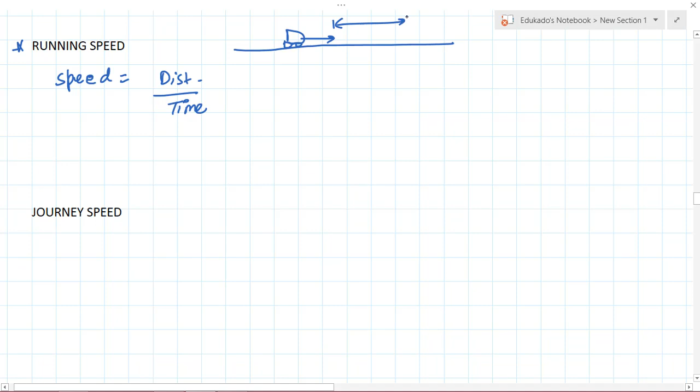Now let's imagine that for about 2 hours you have been driving continuously without any stoppage, but after 2 hours, say you took about 15 minutes of break, fine, so you stopped the car. So you can see over here that when you consider the time

only accounting for the running time, the only time in which you were driving, the time in which you kept on moving, the time you consider in calculating the speed is known as the running speed. Therefore you can say the running speed is equal to total distance traveled divided by just the running time.

Now if I talk about the journey speed, that means you also include the time you have rested. For example, in the running speed you will just observe the 2 hours time, you will not go with this 15 minutes lapse. But the journey speed will be equal to total distance divided by total amount of time. The total amount of time will be equal to the running time plus stoppage, you also call it break time.

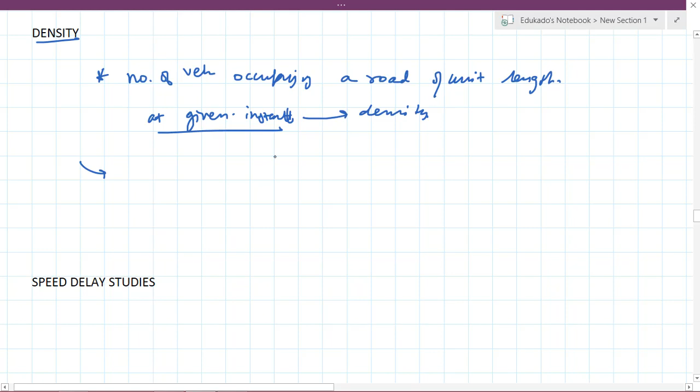Alright, so how are you going to go with this? You can take an aerial photograph of a length of a road, say X. For example, this is the road, and you took the photograph of it and you found that there are a number of vehicles like this. So you can say that the density, which is represented using the letter K, is equal to the number of vehicles, over here it's 1 2 3 4 5, equal to 5 divided by the length of this road, say x kilometers, 5 divided by x, so your density.

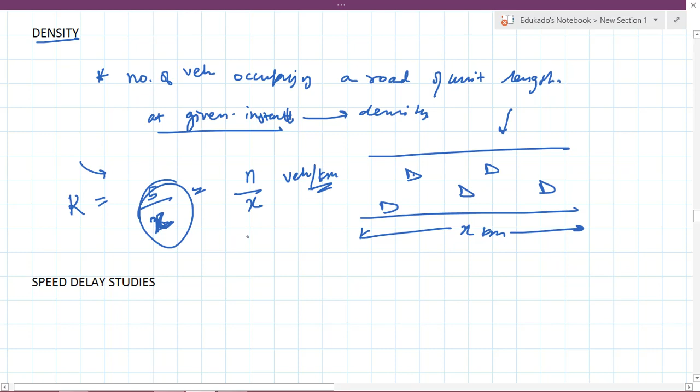So I can call it n vehicles over x distance, so you get the unit as vehicles per kilometer. So the x is the length of the road and the n is the number of vehicles. So this was the density. Now if you need to calculate the so-called running speeds, journey speeds, or the delays in the traffic, then you need to understand the speed delay studies. You need to go through these studies.

So there are a number of methods that are used, like you can make an observer stand over there to see what's the speed of the cars. Point-to-point observation is one of the methods. I can call it the standing observers method. Standing observer method is just standing over there and looking at it, and you can even make it elevated. You can go to some higher ground and watch the road that is passing by and see the speed of things, and whatever study you want to do, you can do. Another way is the license plate method.

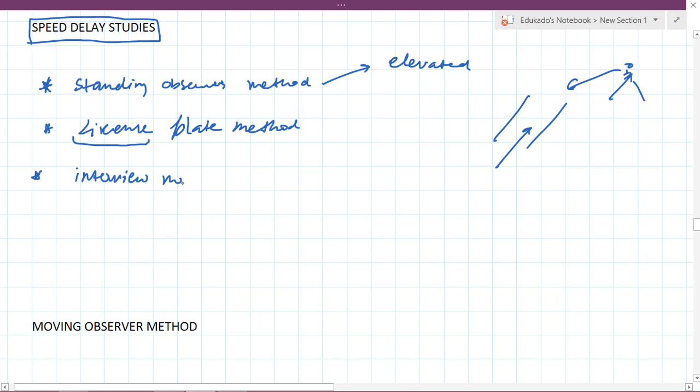License plate method, in which the license plate of a vehicle is observed or noted down, and when it is seen again, you can calculate the distance covered by it and the amount of time it took to reappear. You can calculate the speed. These are just a few of the methods, and you can even ask some people, I can call it the interview method. What was your speed and how were you moving.

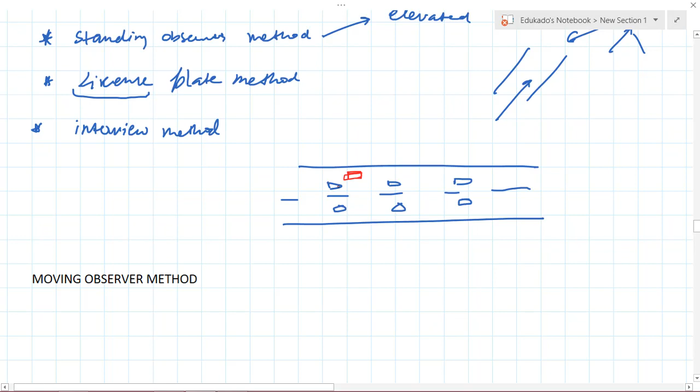Now there is one more way in which if there is traffic like this going on, fine, so there are cars moving over here, fine. So what we do, we take one car as an observing car. It keeps on moving alongside the other vehicles, and we call it the floating car.

And using this we calculate the speed and all the characteristics that we have understood right now. Density also can be calculated using this. So we can calculate the flow and speed and density. Flow, speed and density can be calculated simultaneously using this floating car method.

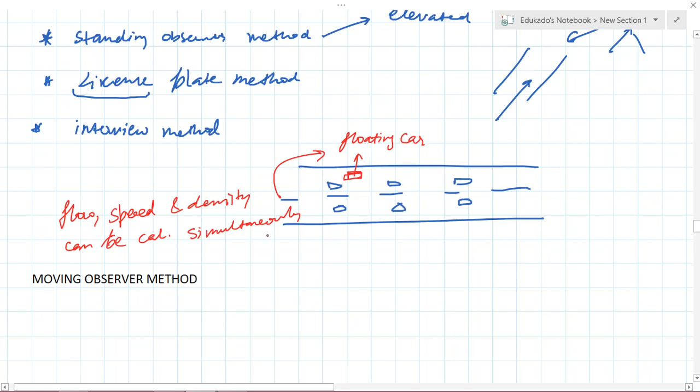Fine. This floating car method is also known as the moving observer method. So the other name for this is floating car. So if we understand about this, the aim of this experiment is to determine the running and journey speeds, to determine the running and journey speeds. Alright, so in this method, just listen to it.

In this method, the speed and the flow can be obtained by traveling in a car against and with the flow. Like I just gave you an example, the traffic is moving like this, fine, and you are in the car. I'm denoting it with a different color. Over here you are in the car and you are just moving with the traffic flow.

So it can be obtained by traveling in a car against and with the flow and noting down the journey time. You can calculate journey time. Later on you can convert it into speeds, and you can even calculate the number of vehicles that you have overtaken. This is the floating car, and the number of vehicles that you have overtaken, or the number of vehicles that overtake you, even you can calculate those things.

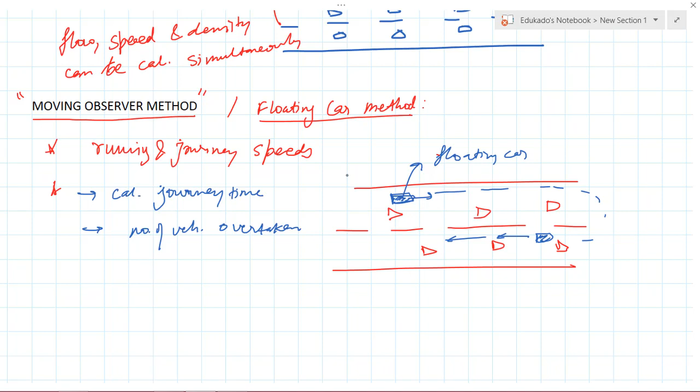And if you go like this and just take a turn over here, and now you move in the opposite direction of this flow, then you can see the number of vehicles that you met when you are in the opposite direction. All these variables you can use to calculate the speed, flow and density. So that's the moving observer method. Now you can define some parameters in it.

So if I say TW, it is the time taken by the vehicle when it is moving with the stream, like it is going from here to here. So that amount of time taken is TW. W represents with the stream. Now if I go against the stream, I will call it TA. So the time taken by the vehicle when going against the stream.

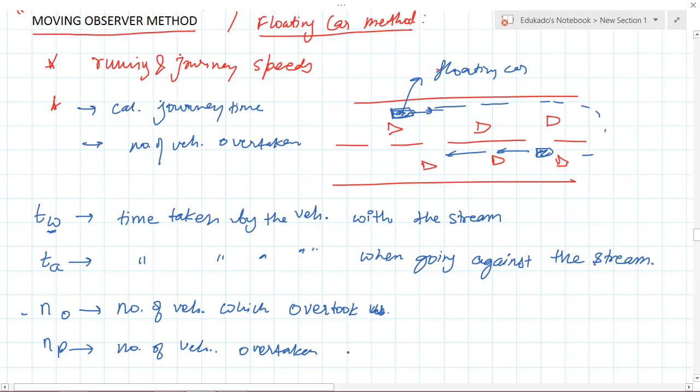Alright, so now all these times are covered. So there will be a number of vehicles which overtook us. As I told you, there can be some vehicles that overtake us. We are just a floating car, a testing car. So the number of vehicles that overtook us is represented by NO, and the number of vehicles overtaken by us is represented by NP.

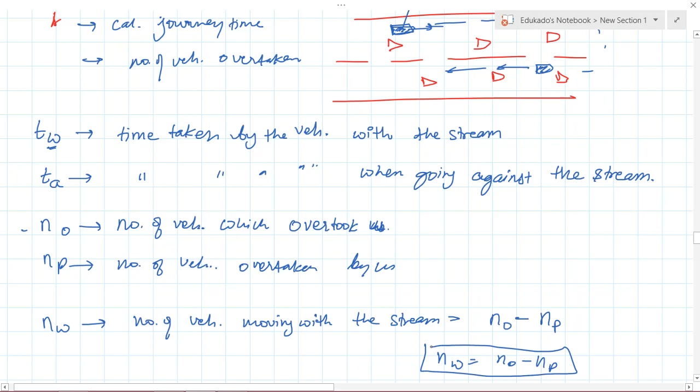And there's one more term, NW. It is the number of vehicles moving with the stream. It is nothing but equal to the number of vehicles that have overtaken us minus the number of vehicles that we have overtaken. So NW equals NO minus NP. This is just a small thing. And NA is the number of vehicles moving against the stream.

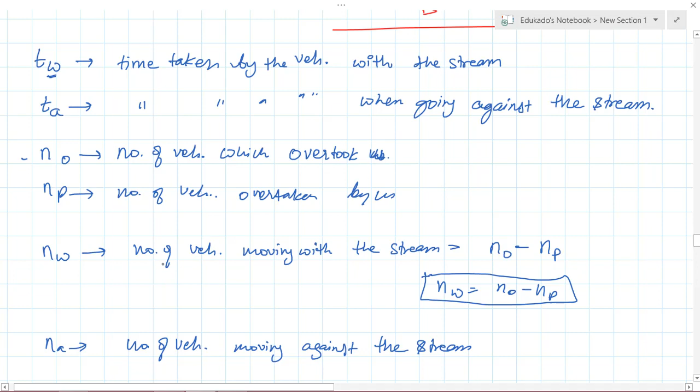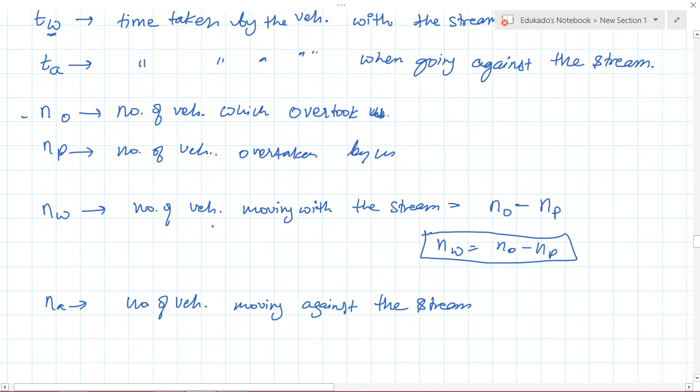So these are some parameters, or things that we can see while we are in the floating car, and using these parameters I can calculate the flow and the average speed. The formula for the flow Q is NW plus NA divided by TW plus TA. So this is the formula for flow. As I already told you, NW is NO minus NP.

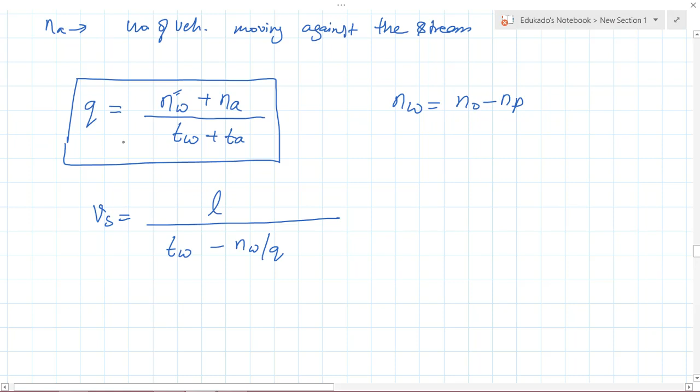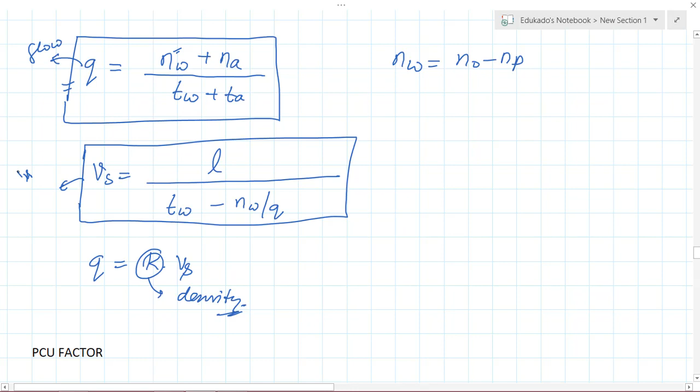And you can also say that velocity Vs is equal to the length that we have covered divided by TW minus NW divided by Q that we have just calculated. So this is one way. And if we want to calculate the density also, we can use the relationship Q equals K times Vs, where K is the density. So using this moving observer method, we can calculate the flow, the average velocity, and the density.

So suppose you are moving on a road, and you see different types of vehicles: obviously there will be some bikes, some cars, trucks and all. What is different between a bike and a car is their dimensions. The bike is much smaller and the car is much bigger. Trucks will be bigger than the car. So the change in dimensions, I can call it directly size. So there is a factor of size involved when we are designing or looking at highways.

So the bike is covering less area or region of the highway. So it is creating less congestion; the cause of the traffic jam is more due to the trucks and cars rather than just bikes. It's a known fact. Now for example, what if I have bullock carts in the middle of the highway?

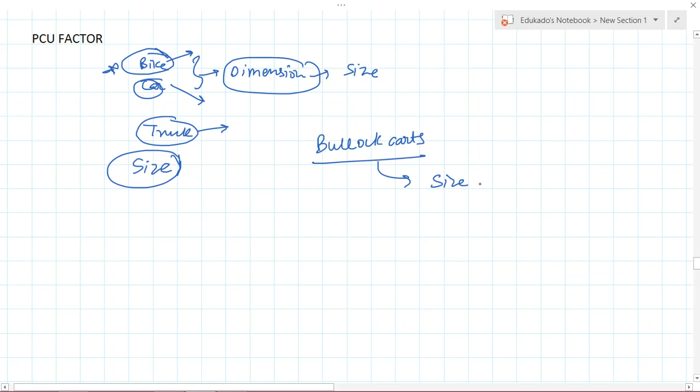Their size is huge, literally they are huge in size. If I say the size is massive, their speed is much lesser. The speed is much lesser as compared to the bike, car and even trucks. So I need to understand that for designing a highway and understanding its flow and speed characteristics, the vehicles must be looked upon using two of these characteristics, like size and speed.

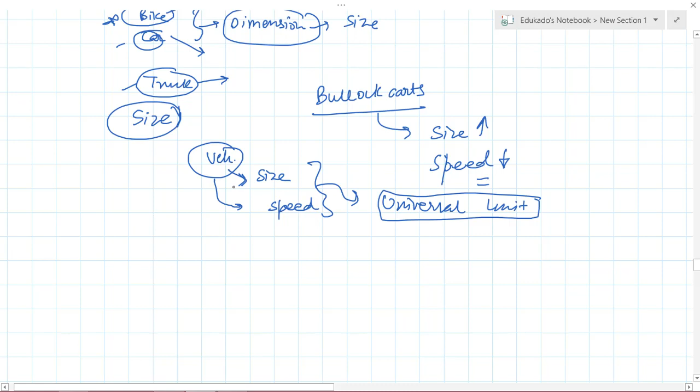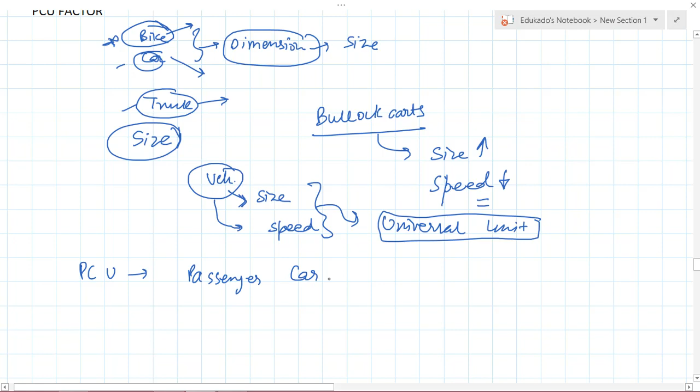Based on these things, there should be some universal unit for these so-called vehicles. So if I convert all the vehicles into some single homogeneous unit, then that particular homogeneous unit is what we call the PCU factor. Now this PCU stands for passenger car unit.

Now you can understand it like this. If I say a car is taking 1 unit space, or according to its speed and dimensions, 1 unit in some road, it's just a homogeneous unit, then I can say that the bike is taking about half of the unit covered by the car. Now what if I call in the bus or the truck? Then these are some of the values given by IRC.

For the bus we take the unit as 3. What this actually means is that one bus is equivalent to 3 cars, and 1 car is equivalent to 2 bikes. So this is how we divide each and every vehicle with its passenger car units. These units are known as PCUs, or passenger car units.

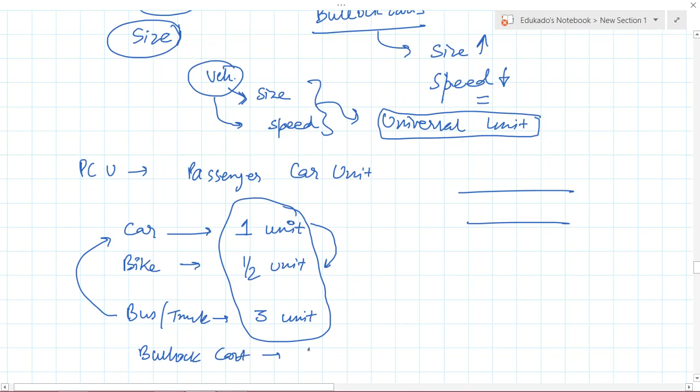Now I talked about the bullock cart. Its unit lies from 6 to 8 units. It's a huge thing. Not only the size matters here, but even the speed. If the thing is slower, the vehicles moving behind it will be forced into a low speed condition, even cars or bikes that are capable of more speed. So this bullock cart must be considered for size as well as speed. That's why such things are given a much higher PCU value.

This represents that a bullock cart is equivalent to about 6 cars or even 8 cars moving at a time on the road. So it will cause much more traffic jams and congestion. But the bike is, you can call it, 0.5 unit only. So these are the PCU factors.

Alright, so now, as I told you in the beginning, there were some fundamental traffic characteristics: flow, speed, and density. We have talked about them till now, right? Using these parameters, I can derive some other parameters, known as derived characteristics, which are also known as microscopic and macroscopic characteristics. So they are the derived characteristics of traffic.

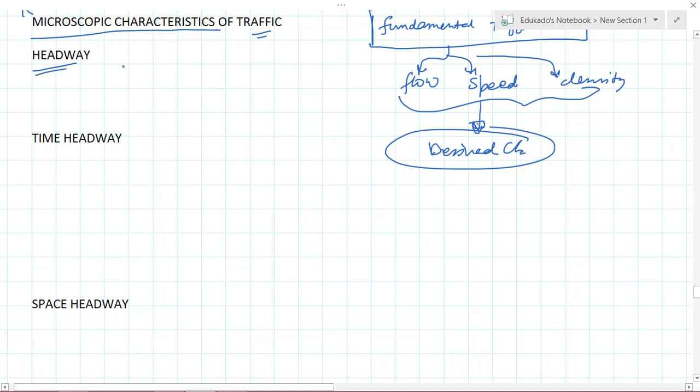The first concept that comes is the headway. Headway is like the distance between two moving vehicles. It is subdivided into time headway and space headway. Let's understand time headway. For example, there is a road with two vehicles. They are separated by some distance, but they are also separated with respect to time. After 2 seconds, this one will come to here. So you can determine the gap between two vehicles not only by distance, but also by time. This is known as time headway.

So in theory, it will be the difference in time between successive vehicles. Its unit is seconds per vehicle. Now the thing that needs to be understood here is that this is nothing but the inverse of traffic flow.

If you remember, traffic flow was vehicles per hour. If I take the inverse of vehicles per hour, I get seconds per vehicle. So dimensionally and conceptually, you can understand that the inverse of traffic flow is equivalent to the time headway. Now let's jump to space headway.

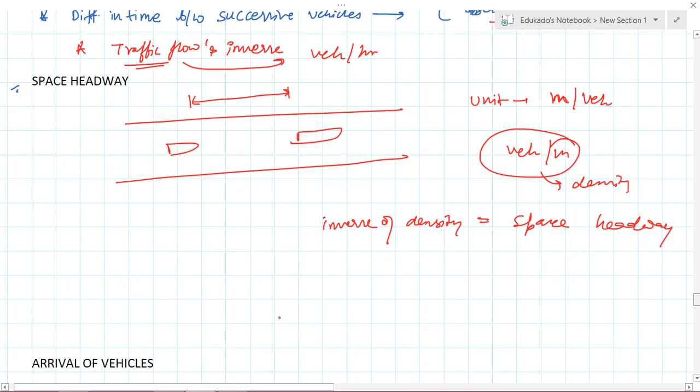Fine. So this was about it. Now let's jump to another topic, that is the arrival of vehicles. Now I want to predict what will be the arrival of the vehicles coming. For example, I have a question: find the probability that you will observe 0 vehicles in 8 seconds on any road. You need to find the probability of this thing happening.

So now let's see what I just said: I need to find the probability that we will observe 0 vehicles in 8 seconds, where the flow is given to you as 900 vehicles per hour. Now you need to calculate this probability. For this probability, we use the so-called Poisson distribution.

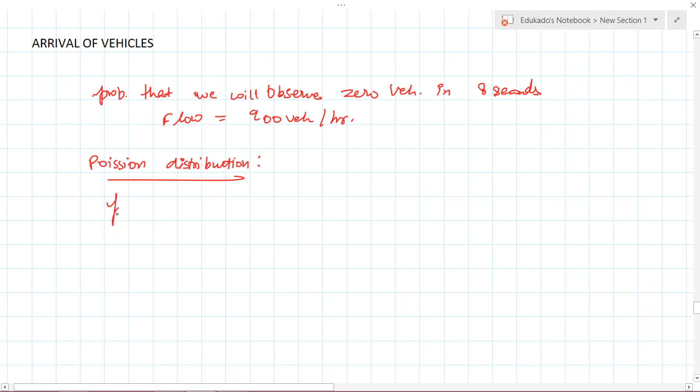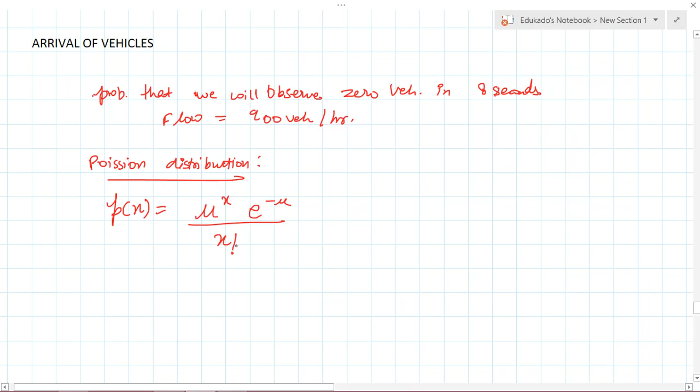The formulation is: P(x) equals mu to the power x, e to the power minus mu, divided by x factorial. To solve this question, first we need to find the flow rate per time t, here 8 seconds. The flow rate is 900, multiply it by 8 seconds, and to convert into hours divide by 3600. This comes out to be 2 vehicles. So in 8 seconds, 2 vehicles are passing currently.

So what is the probability that in 8 seconds none of the vehicles will pass? We can calculate that using this. We substitute x as 0, and the flow rate is 2. We don't need to consider the time, because we already included it to calculate the 2. When you substitute these values, x = 0 and mu = 2, you get P(0) = 0.135.

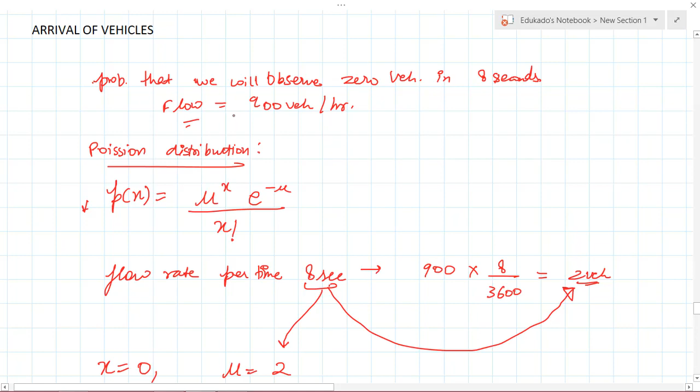So this is the required probability that in 8 seconds 0 vehicles will pass, even though you know that every 8 seconds 2 vehicles must pass according to this flow. But probability-wise, there's a 13.5% chance that no vehicles will pass in 8 seconds. Such studies of the arrival of vehicles are done using the Poisson distribution.

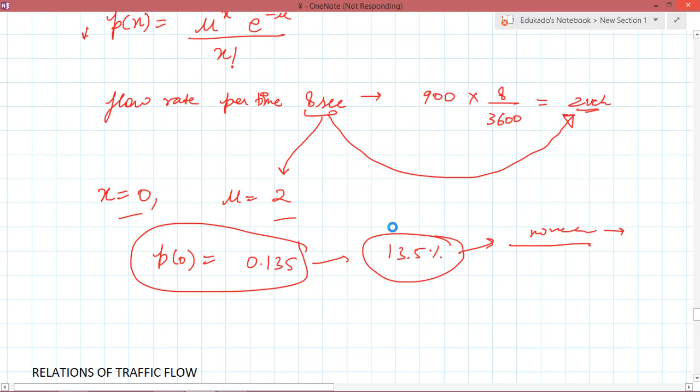Okay. Now in the relations of traffic flow, we will consider the graph relationships, how they vary, like the relationship between flow and speed. This is the first concern. Speed is Vs and flow is Q. At the initial point, the flow will be 0 in two conditions: either when there is no vehicle, or when there are too many vehicles that they cannot move.

So I'm considering 2 points, one over here and one over here. In this the speed will be maximum. Now if I go to the maximum flow, at some point this should be the maximum flow. The speed will be between 0 and the free flow speed, which I call Vf. At this speed the vehicles just keep on passing; they will not pause. At free flow speed there is no congestion and no flow formed, therefore the value is 0 here.

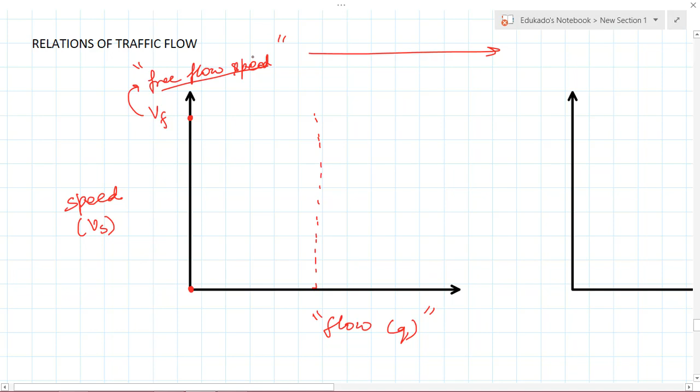So I can say that flow is 0 either because there is no vehicle, or there are so many vehicles that they cannot move. Because they cannot move, their speed is 0, and where there is no vehicle, they follow the condition of free flow speed. Any vehicle can come and go at the recommended speed with no restriction. So this point is Vf, and the initial point is V0.

The maximum flow condition will happen somewhere in the center, and its value will be at a speed between 0 and the maximum, because the speed cannot exceed the free flow speed. So I will get a curve like a semicircle, like this.

So over here will be the maximum flow, and this maximum flow will be at speeds between V0, that is no speed at all, and the free flow speed. So it will be lying somewhere between, because it cannot exceed this value and cannot go below this value either. So it will form a curve like this. It's not exactly a semicircle, it's a parabolic thing. I've shown it here like a semicircle, but it is parabolic, and this value is known as Q max. Alright.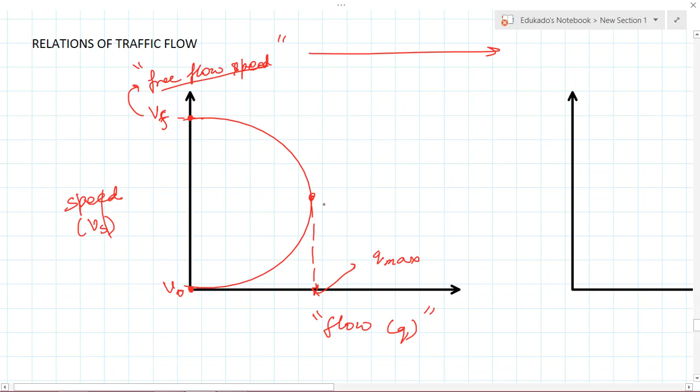Now let's go to another relation, which can be formed between the flow and the density. Over here I'm taking density on the x-axis, and the flow I'm taking over here. So what I will see is that when the density is 0, the flow will also be 0, since there is no vehicle on the road. So I get that point over here, and as the number of vehicles gradually increases, the density as well as the flow increases. It will keep on increasing. Now when more and more vehicles are added, it reaches a situation where vehicles cannot move.

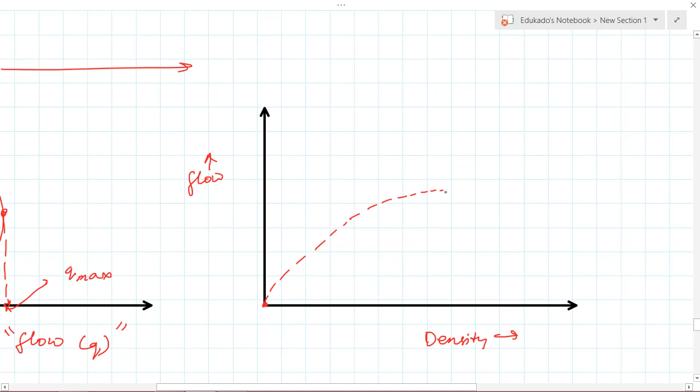This is referred to as jam density. Now when the vehicles cannot move, you can say that you are coming up to here, somewhere over here. So the flow started increasing, and then it slowly decreases, because at the start there are no vehicles, so there is no density, no flow, nothing. But as soon as the vehicles start coming, the flow increases, density also increases, and it reaches up to some

maximum point. After that the congestion increases on the road, so the flow decreases as the density keeps on increasing, and a point is reached when the flow is again zero, but the density is maximum over here. So this density is known as jam density. I can call it K jam. Since the vehicles cannot move at this jam density, the flow value is again zero over here. And there will be some density between 0 and jam density where the value of flow will be maximum.

So I can call it again Qmax, and I can say that at Qmax the density is K naught. So that's how it's going to vary.

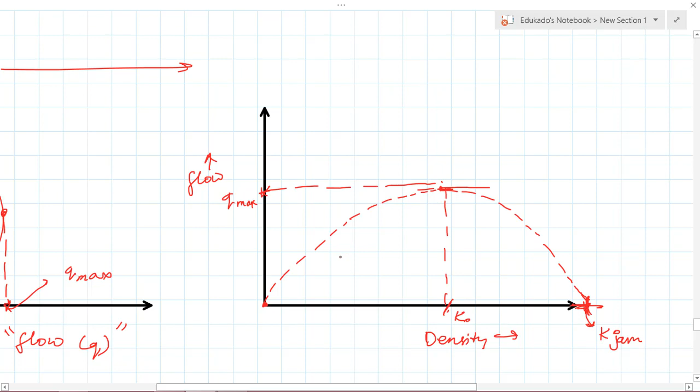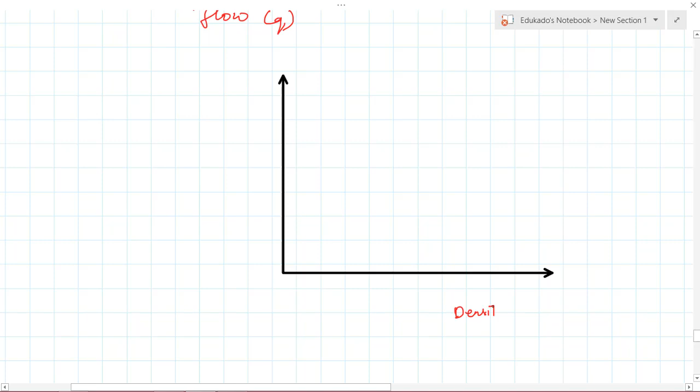Now one more relationship is there, between speed and density. Let's take density again over here and speed over here, on the y-axis and the x-axis. When the speed is maximum, the density is 0, obviously, because all the traffic is just going, it's not staying at a particular section, so density is like 0. And this speed is known as, as I've discussed before, VF, the free flow speed.

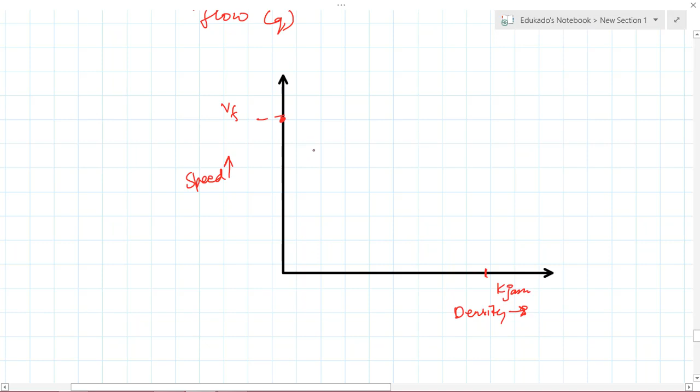And at the jam density, Kj, the maximum density, which I call K jam, the speed will be 0, because there will be no motion of the cars. So this represents a straight line, a linear relationship; there is no parabola involved here. So I can show it like this. This is the graph between speed and density, and that's all there is for the relations of traffic flow.

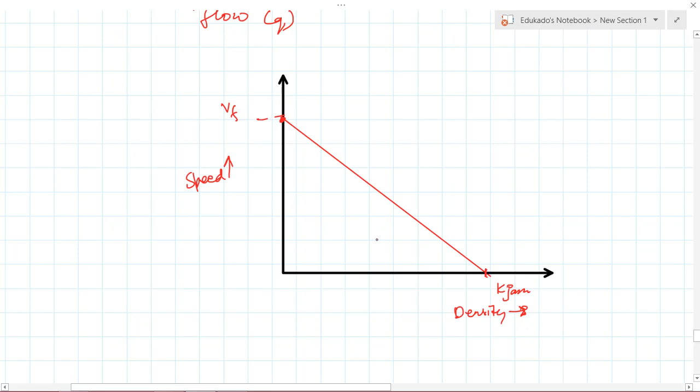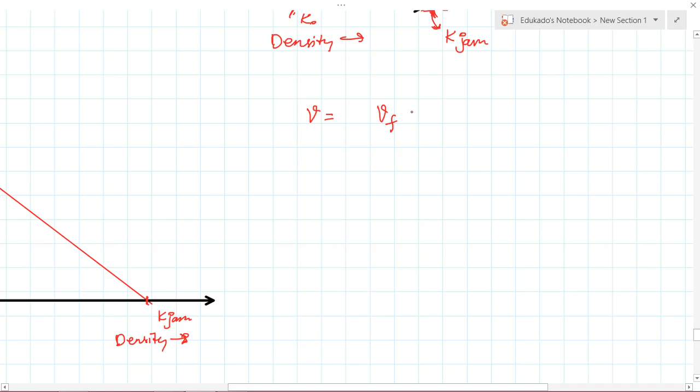Now if you want some mathematical relations for use in the GATE exam: if you need to calculate the velocity and you know the free flow velocity, V equals VF times 1 minus k divided by kj. And q, as I've told you before, equals k times velocity. Q is the flow, this is the velocity, this is the density, and k naught is equal to k jam by 2.

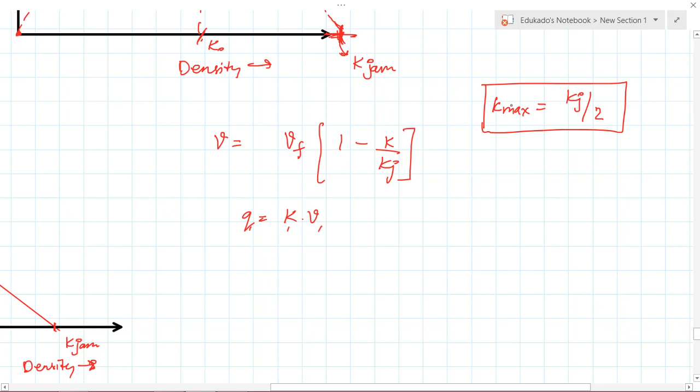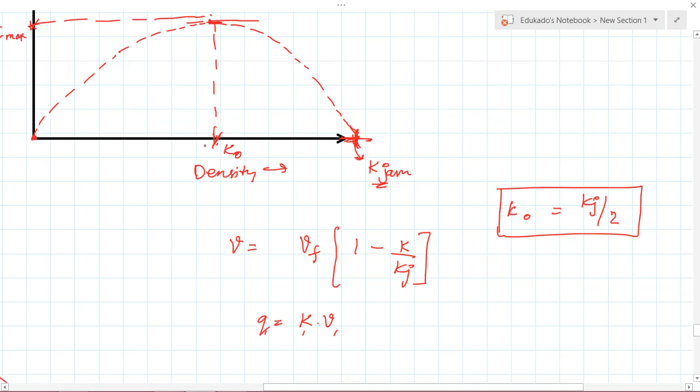And what is this k max? I mean this K naught. K naught is equal to k jam by 2. That means it's just at the middle of this line over here. So if I say speed, V naught is equal to free flow speed by 2; everything becomes half if you go to the center point.

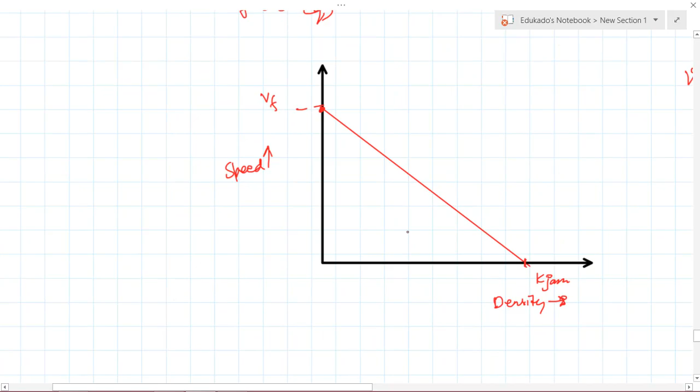Then from here I can say that Q max is equal to Kj times VF divided by 4; there are two 2's, I'm just multiplying them to get Q max equals Kj VF by 4. So these are some relationships for traffic flow. The important thing is to understand the graphs and some of these relationships.

Okay, before we come to this level of service, let's understand one more term, that is the capacity. What is capacity? Capacity is the maximum flow, which is like Q max. It is known as capacity. Now it is affected by the factors.

Some of the factors are like, what is the width of the lane? I call it lane width. And what are the different varieties of vehicles that are passing through? I can call it composition of vehicles. And what is the alignment, the curves and all things? I can just call it alignment of roads. In geometric design we will understand much deeper what they really mean, but for now it's fine.

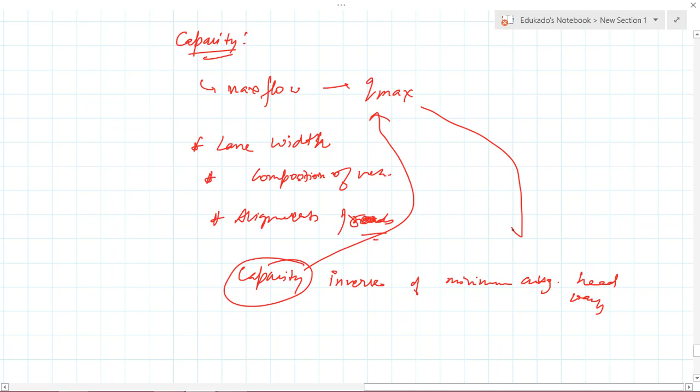Alright, so this was the capacity, and this capacity is nothing but the inverse of minimum average headway, because this capacity is nothing but Q max, so its inverse will give me minimum average headway. That's all that needs to be understood about it. This was capacity.

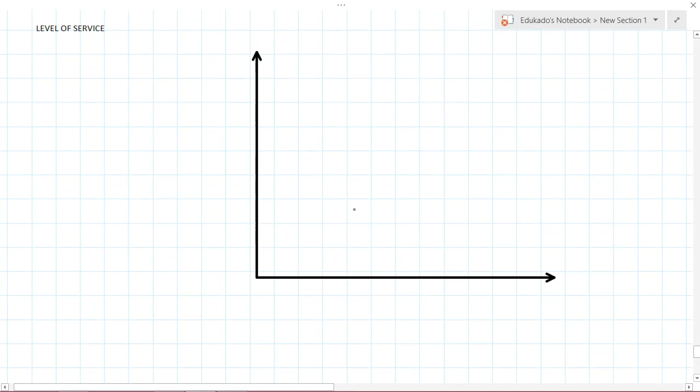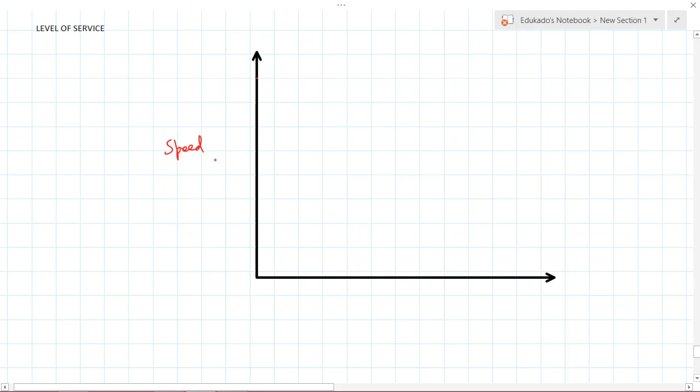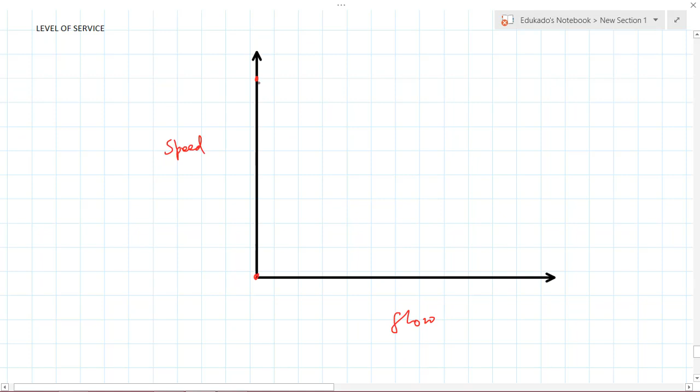Now let's come to this level of service. So from the speed flow graph, it was like this. If I say this was the speed and this was the flow, I was getting 2 times flow, the 0 points. And there was a maximum point, and it was going like this, and like this it was coming. So I said this was V0. This V0 was corresponding to the maximum flow, I call it Q max. And this was a free flow, VF.

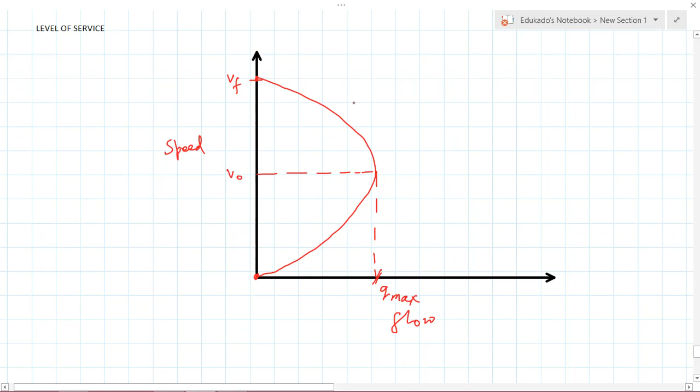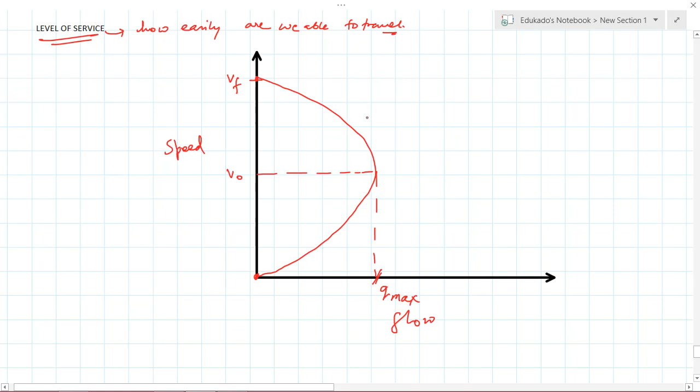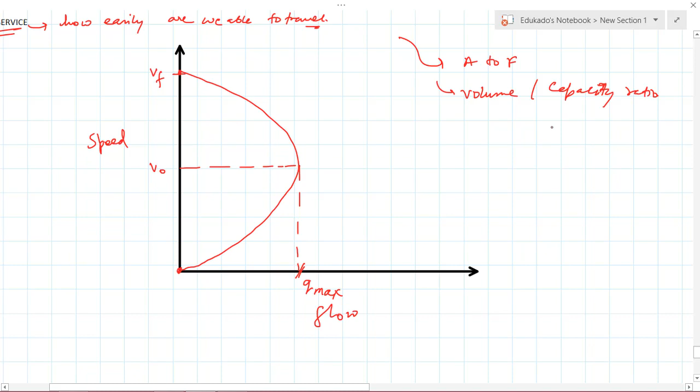So according to this speed flow graph, level of service is determined. What is this level of service? It is how easily we are able to travel. It is determined by this, and it ranges from A to F. This is according to the Highway Capacity Manual, so you can't debate about it. It is based on the volume capacity ratio, and can be represented using this speed flow graph.

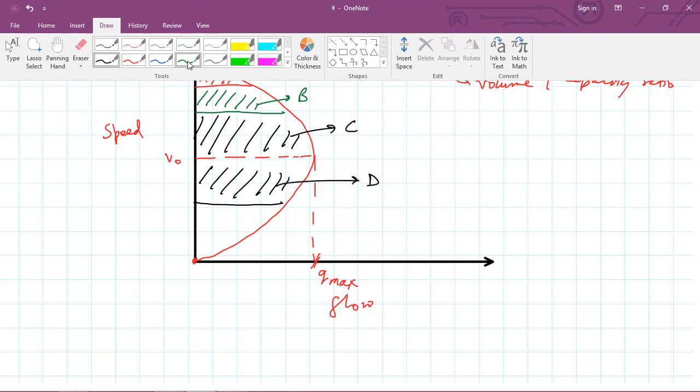So if I make some segments out of it, I can say this initial part is for A. We will understand what these A, B and all these are, but let's first categorize them. This part is for B. This part is for C, and this part is for D, and again let's come to here. This part is for E, and the final part is for F.

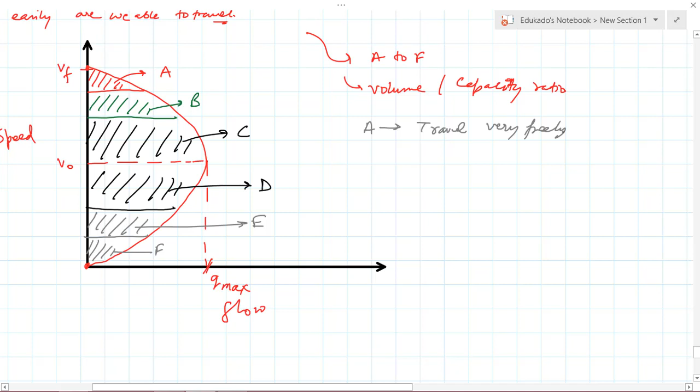Alright, so if I talk about A, in this type of road we travel very freely, and freely means we are close to our max speed. For level of service B, we say it's a little free, but from here that freeness decreases, up to the point of F where there is a jam-packed situation.

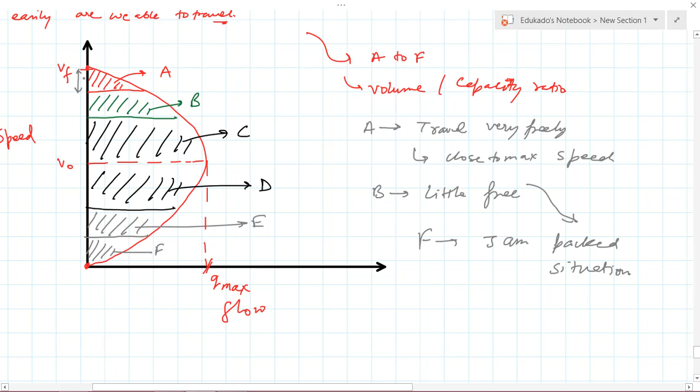So you can see that in section A, the value of speed is much higher. Over here there is no restriction, you can just flow, and the value of flow is also less. In B, the speed is coming less and the flow is coming more, so there is a little less freeness. In C, the speed has been reduced substantially and the flow is increasing, so a jam condition is going to happen very soon.

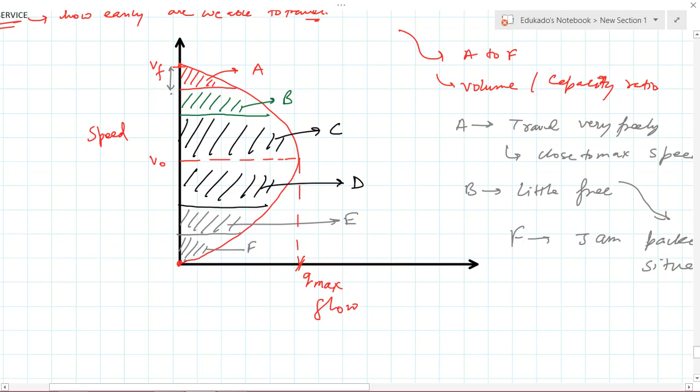And at last at F, there is no speed, there are too many cars, and you can't move, there's a jam condition, so your flow is also not happening. That is known as the jam-packed situation. That's all related to this level of service.

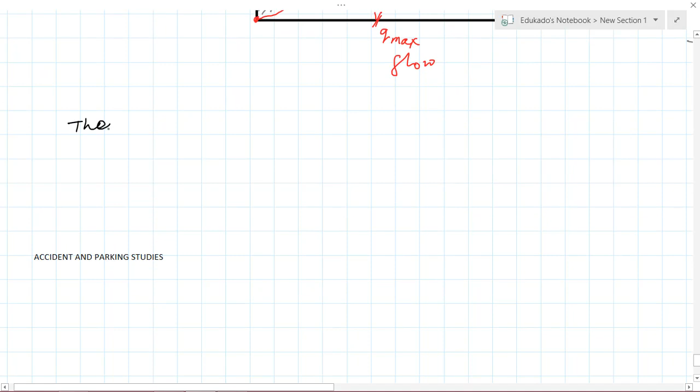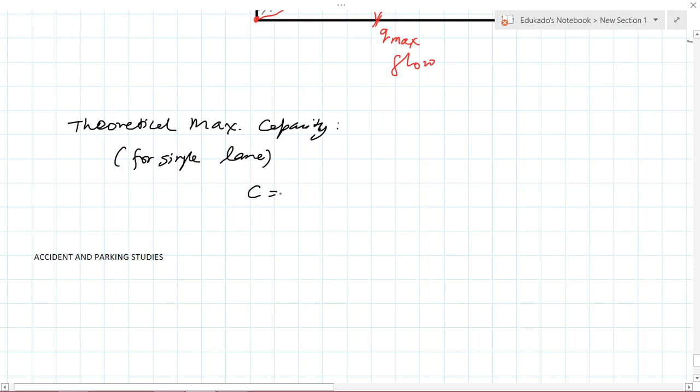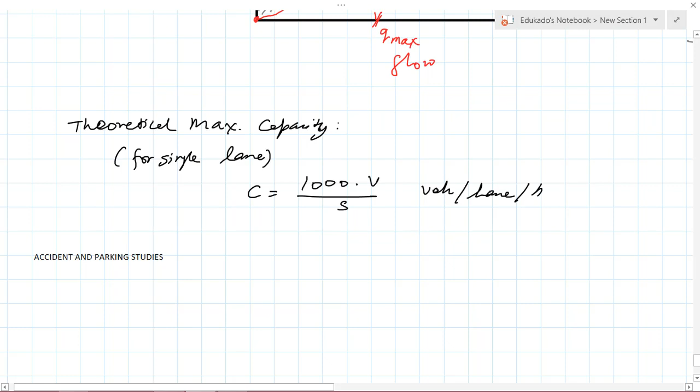Now, before we come to accident and parking studies, let's understand one more thing, that is, what is theoretical maximum capacity? This can be calculated for a single lane: C equals 1000 times V over S, and the unit is vehicles per lane per hour.

Now, what are these things? This V is the speed, in kilometers per hour, and S is the average center to center spacing of vehicles.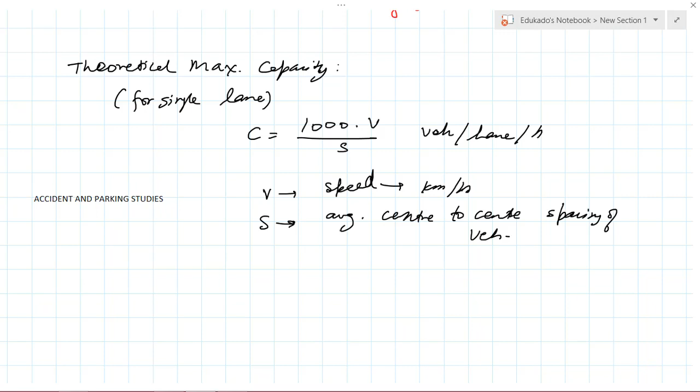Now let's discuss two questions that came in GATE 2006 and 2012. After that we will dive into accident and parking studies. You will understand some of the symbols that are used, and then we will go to traffic signals, rotaries and all those things. So this is the question that came in GATE 2006.

So what it is saying is, on an urban road, free mean speed was 70 kilometers per hour, and this free mean speed is given by this USF over here. Average spacing between vehicles under jam condition is 7 meters. It is just a spacing given to you; you don't know this jam density.

What all things are given? This is one of the relationships that has been given, and this is another relationship. We have just seen this in the last relation. So this is U equals USF times 1 minus K over Kj, where K is simple density and Kj is jam density. USF is the free mean speed, U is the space mean speed.

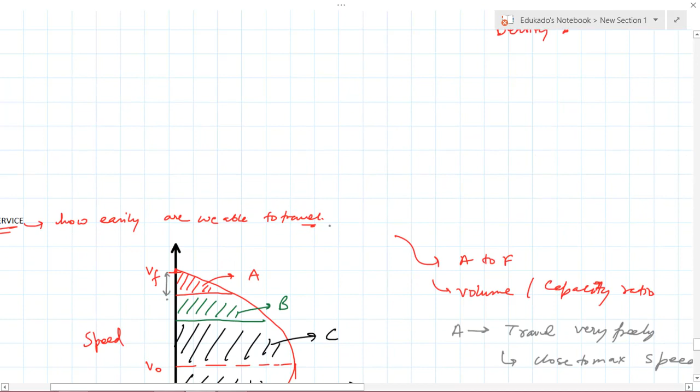So how to attempt this question? For this you need to calculate the Qmax. You can directly go for the relationship I gave you as it is: Qmax equals Kj times Vf over 4. So if you want, you can use this formula. Just see what is written over there. This is Vf, so Vf into Kj by 4.

So I can use it like Qmax equals Vf into Kj by 4. This was the formula given. This Vf is nothing but your free mean speed, USF. This is Kj by 4. Now you will be considering what this Kj is. You are given the average spacing under the jam condition, which is 7 meters.

So to calculate the density, you can write it like this: jam density is the number of vehicles in 1 kilometer length. If I want to calculate the jam density for a space headway of 7 meters, I would take 1 kilometer converted to meters divided by 7, which is also in meters, and I will get 142.86 vehicles per kilometer. This is the jam density, and this is how we calculate it.

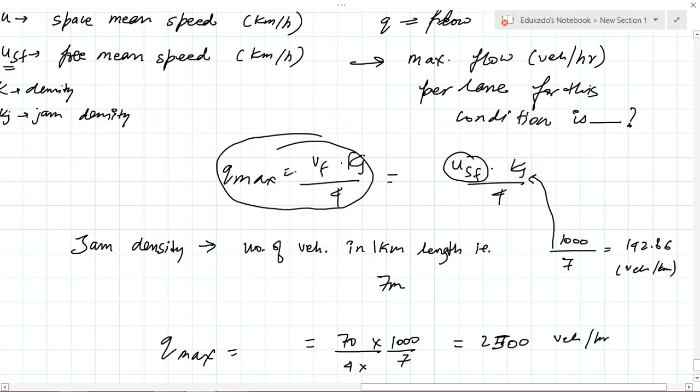But you must understand how we are getting this formula. I already told you that K equals Kj by 2 and so on. So now let's derive these formulas. You are given these two equations. Now you can say that Q equals UK. In place of U, you can place USF times 1 minus K over Kj, multiplied by K.

Now you need to find the maximum Q. For maximum flow, you need dQ by dK equals 0. When you differentiate, USF stays as it is, K comes inside to form K squared, Kj is a constant so it is 1 upon Kj, and K squared differentiates to 2K, and everything equals 0. So 1 minus 2K over Kj equals 0, giving K equals Kj by 2.

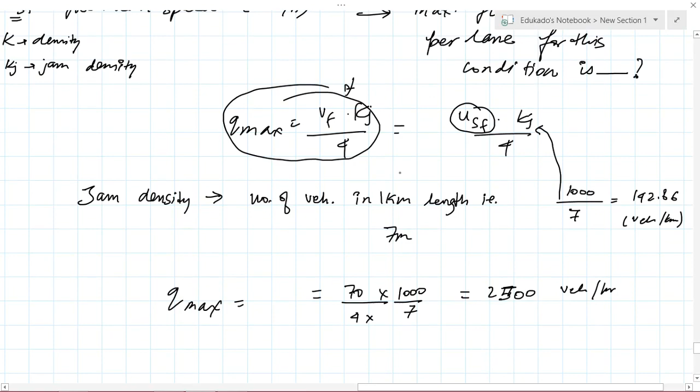If you put this value back, you get Q, which is now Qmax because you're placing K as Kj by 2, derived from the maximum condition. So Qmax equals USF times 1 minus Kj by 2 divided by Kj, times Kj by 2 outside. After solving, you get USF multiplied by Kj divided by 4. So this was how this equation was derived. You can directly remember it; you will get the same answer. This question came in 2006.

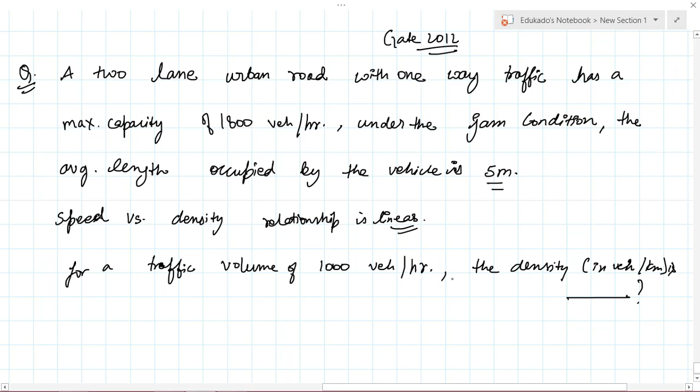So this question also came in GATE. It came in GATE 2012. In this question, a 2-lane urban road with one-way traffic has a maximum capacity of 1800 vehicles per hour. Under the jam condition, the average length occupied by the vehicle is 5 meters. The speed versus density relationship is linear. For a traffic volume of 1000 vehicles per hour, you have to find the density.

So in order to attempt this question, we need to understand what things we are given and how we can utilize them. I just gave you one formula for maximum capacity: C equals 1000 V over S. So what was this? C is the maximum capacity, and it is the same as the flow.

So here the maximum capacity is given as 1800, equal to 1000 times V, which you don't know, that's the average velocity of the vehicles, divided by S, and S here is the average length of a vehicle. Here it is given as 5 meters, so I will use it as 5. From here the value of V comes out to be 9 kilometers per hour.

And we know that this velocity is equal to V free divided by 2. So from here the free flow velocity Vf equals 2 times V, and that is 18 kilometers per hour. Now we know one more formula: this max C, you can also call it Q max, maximum flow, equals 1 upon 4 Kj times Vf. So Kj you can calculate using this.

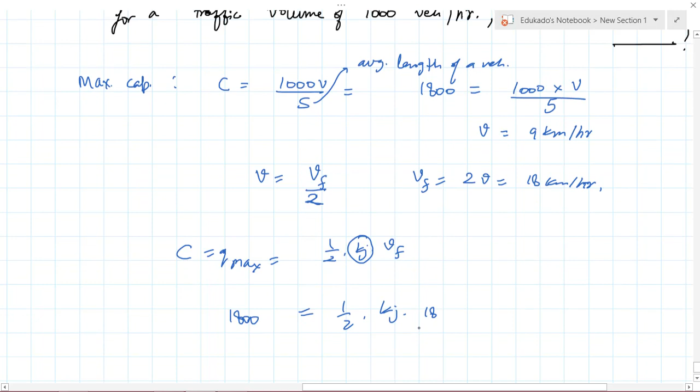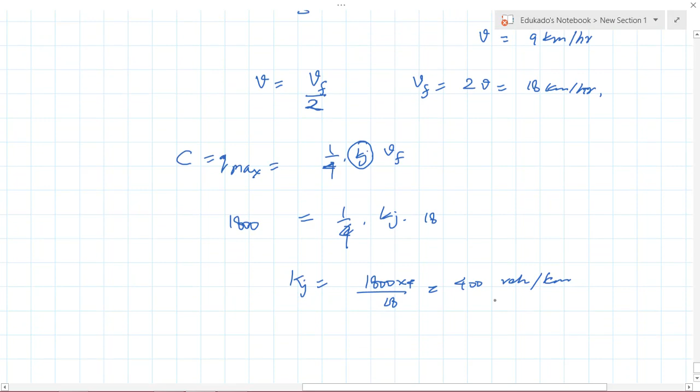So how are you going to calculate? Qmax is given as 1800, it's 1 upon 4 Kj, and Vf you have just calculated as 18. So Kj comes out to be 1800 into 4 over 18. It is 400 vehicles per kilometer. So I got the jam density here.

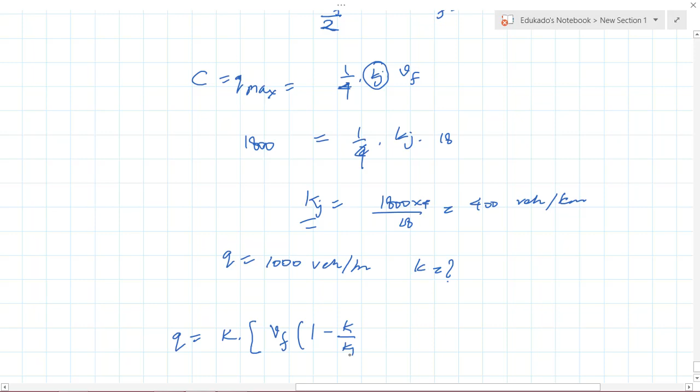Now in the question it is given that if q equals 1000 vehicles per hour, what is the density? I know that q equals k times Vf multiplied by 1 minus k over Kj. Here q is given as 1000, and k we don't know, we need to find it. Vf is 18, we just calculated it, and Kj came out to be 400.

So from here the quadratic equation will be formed: 18k squared minus 7200k plus 4 times 10 to the 5 equals 0. If you solve this quadratic equation, the value of k will be either 66.67 or 333.33. Now you need to consider only one of these two values. The options given were A 52, B 68, C 67, D 75. So after seeing the options you can directly take 67.

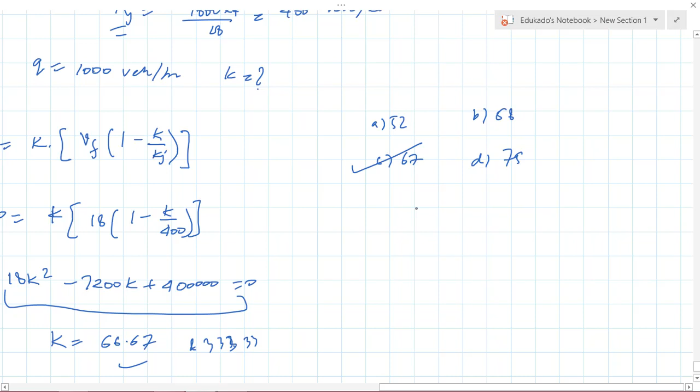But if you want surety, like in a fill in the blank question, you need to be sure which value to use. For this you need to go for the flow versus density diagram. Density was taken here and flow, Q, was taken here. If density is 0, the flow will be 0; as density increases, flow increases until it is maximum, then density increases but flow decreases, until there is a jam, which I call Kj.

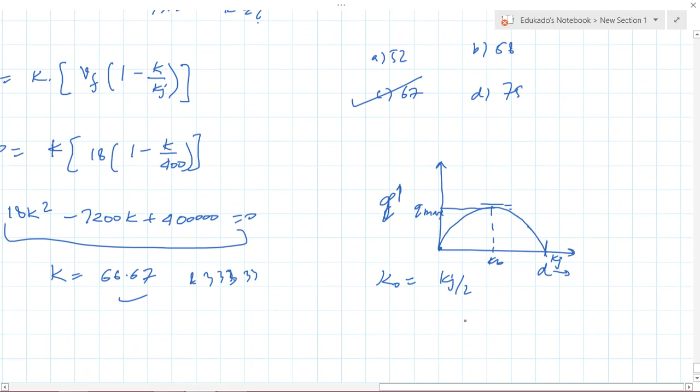So this was Kj, and when flow was maximum, Qmax, this was k naught, and k naught is Kj by 2. Qmax is 1800, and you are calculating for a lesser value, q equals 1000. So the new k corresponding to q must be less than Kj by 2, because for 1800 the value is k naught, and for 1000 it will be lower on this graph. So for k less than Kj by 2, there is only one value, 66.67. Therefore C is the final answer.